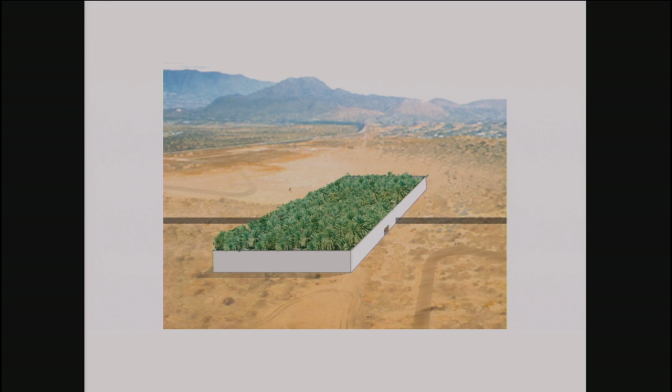Now, the difficult double for us is also an idea that one project always carries the promise of another one, or an echo of another idea. So here you have the Mexican border crossing project, which in one way or another is very reminiscent of this picture by Bas Princen, a photographer with whom we work very often. This is one of his own photographs - it has nothing to do with our work, which in many ways started to become part of this accumulated knowledge.

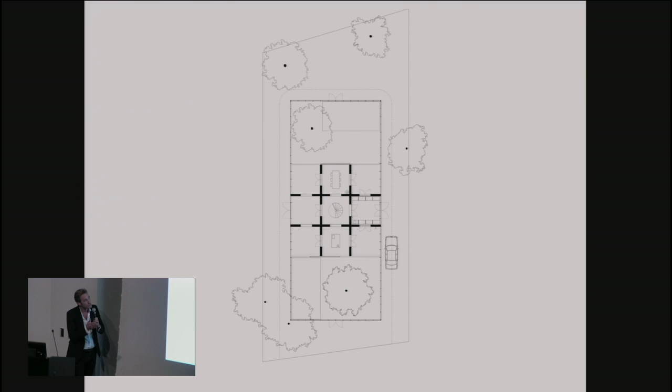For us, thinking about this endless development of single family houses, and the idea or the dream of luxury in that, we thought that was something to think about, especially because the plots are actually quite small, and every plot has its single fence to make it clearly your own property. For us, the fence became the main device to define the house, and we actually put it not on the border of the site, but inside, to become the first perimeter, which is the real house.

As you can see, somehow at its margins, the site left a certain wilderness. So the idea of being back in wilderness was very important when we constructed this house. At the same time, the fence forms this green perimeter, which changes over the year. Every season these leaves fall and come back, giving you a domesticated patio from which you can start living the real house.

Inside this perimeter is constructed a house based on a very simple idea of a plan of rooms. Rooms that have on the ground floor a very basic repetition. It's a cross plan, 9 rooms, and it doesn't have a facade, since you're immediately in relation with the 2 domesticated patios of nature.

On top of that, there's the same plan repeated, but in a very different way. It is, as you can see here, a house 3 meters high, very elementary on the ground floor, and it becomes a roof standing on that perimeter, on that fence, but with the same plan. This is the plan of the first floor, with the same plan, but this time it has a facade around, looking to the fields in front and the forest in the back, not towards its neighbors. It just repeats the openings in the walls of the rooms every time.

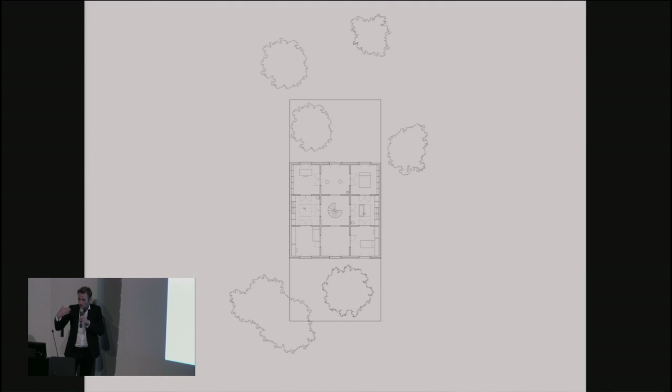And of course, it gives 2 very distinct universes to live in, although the rooms are just repeated and filled in according to how we live in a house, by furniture, by elements of life, by things to live with. Even a bathtub could become a piece of furniture.

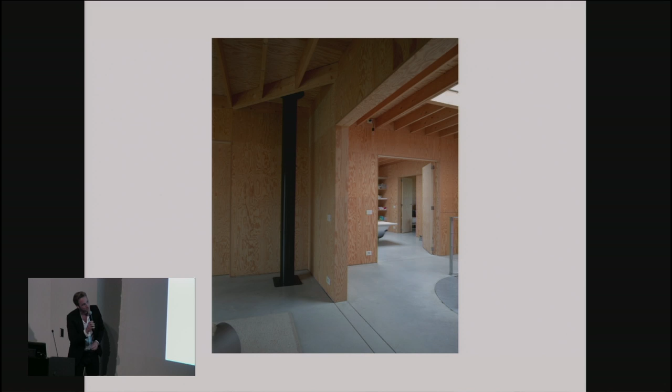What was very important with this house also is that we design it from the inside. It's something we do a lot with our projects. This shows details where we show the windows, how they're treated and hang on the perimeter on the outside, and we have very big sliding windows that make it possible to close off one of these rooms on the ground floor. This kind of thinking is ultimately brought into detail, both in concept and in the detail of architecture.

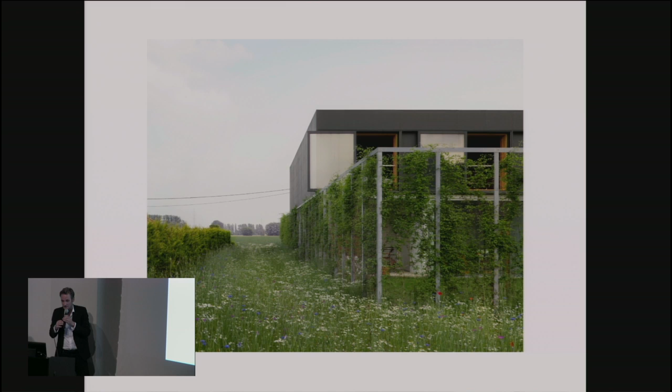So this house which David describes, as David was introducing, we try to always show double projects in some sense. It has its double in this house, which is built not so far away from the first one, about 15 kilometers away. You could say a very similar context on the one hand and quite different on the other hand.

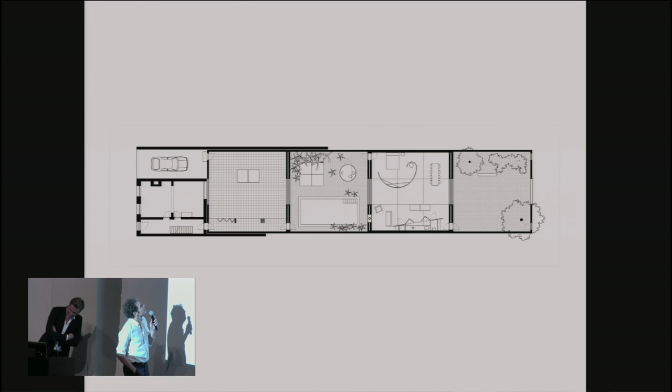And we were even more intrigued because they told us they would like to make a weekend house there. I have to say, Belgium is not very beautiful, but that place is even worse, so we were totally shocked. We thought, you never want to do that. But in some strange way, the fact that they insisted and came back to us and said, no, we want a house, and it even needs to have a little pool or something. You can do whatever you want with all this stuff in the back of the house, but we want to keep the front house.

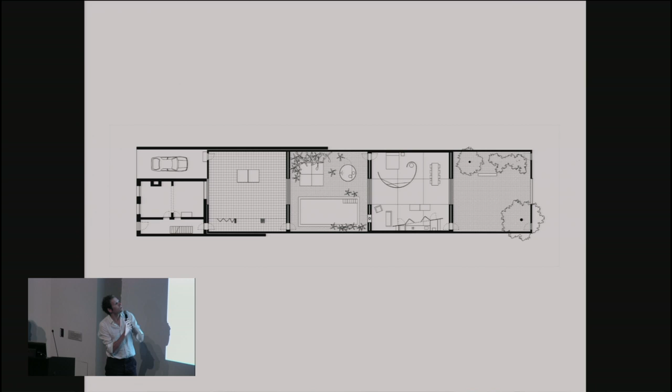The house David just explained has 4.5 by 4.5 meter rooms, so in a way a quarter of this size. These big rooms were either outside—the first one and the fourth one—or inside or semi-inside the two middle ones. So very similar in plan to the building before, but sometimes, as the section after shows, the first room is somehow inside and the second outside, then inside again, then outside.

So there's certain ambiguity, very apt we thought, within that idea of building a building which totally escapes its own context—very ambiguous about what the actual climate and the actual specificity of the interior is.

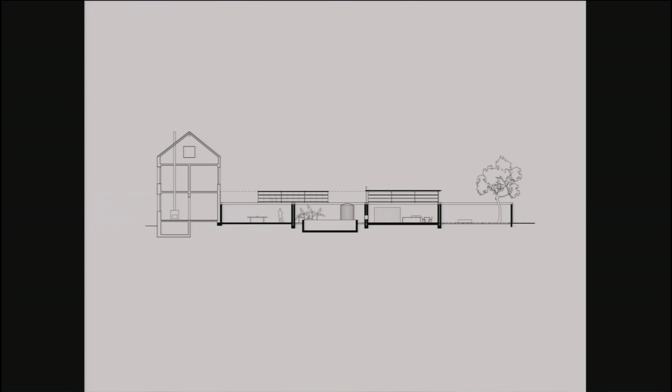So here you see the front house and the new house. The new house, seen from the front house, is in a way nothing more than a sequence of 4 big rooms. Here the roof is in front of the first space, and the space with the pool is now open, when the weather allows.

You see that in some sense the house fills the whole site. So as opposed to the first building, here the borders are completely taken, and everything is somehow ambiguously either garden wall or building wall. That's how you approach the house.

There's a kind of single brick wall—I should say something about it—which, when you enter, is in a way a white painted wall with typically a steel truss on top of it. If you go back to the section or the plan, you see that the rooms are made by these single brick walls.

So there are 4 rooms, always with a single brick wall. When the rooms touch each other, there's a double wall with a certain thickness. The sliding window goes in between, and there's a double door, which adds access to what the sliding doors already provide, to each of the rooms.

So literally a set of interiors glued against each other. The moment you see the last one, in the front or in the back, you see that single brick wall not treated, because the only thing we're really interested in is the interior itself. So you go back to that sequence, and you see the way you approach the unfinished outside wall, which to a certain extent we ignored.

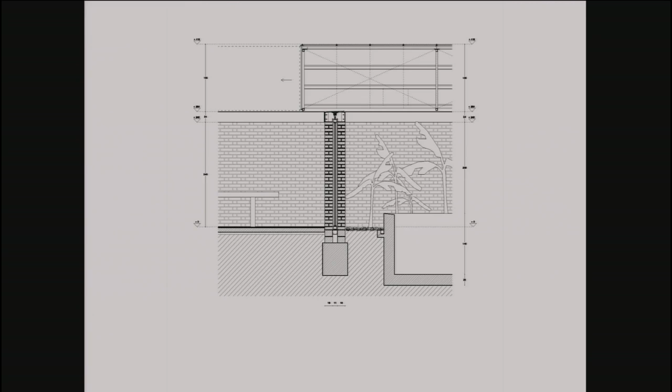Of course you might think this is extremely specific, but it's exactly this specificity—the height of the wall, which is 2.70 meters, these steel beams on top of it, which somehow make a cornice but also make a rail for the roof to move, also make a rail for the glass to be open or closed. It's these very specific details which, in our opinion, make the house perform that way.

So there's this ambiguity about what these elements really do. In some moments the beam is really functional, and in other moments it's there to complete, in a way, the architecture. So in one of these rooms, the most closed room, the roof has the same detailing as the movable roof, but it's just fixed and closed.

It's a very simple element made out of leather on the inside and a very thin kind of Polish pine wood, kind of plywood, which organizes the space. For us, interestingly, it's exactly these different sizes of spaces, although they're always the same, which force these kind of different solutions.

And then ultimately—I believe it's more or less the last image or sequence—you see that what we thought ourselves was totally impossible, that you could actually build an escape space in the middle of this kind of mess, turned out to be a reality. Cutting away roughly 3 meters from the existing context beautifies what immediately surrounds you.

Second duo, this is also a project in Belgium. We look at an aerial picture of tree growers - pépinière in French, or tree nursery in English. It's a company that grows trees and transports them all over the world, one of the biggest nurseries in Belgium and actually in Europe.

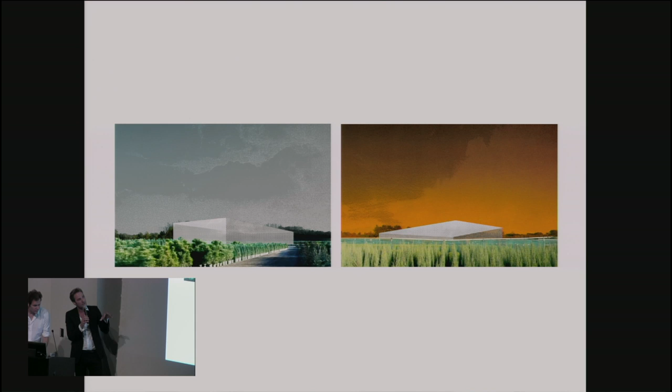In the middle of that there would be this gigantic hall covering trees for a few days to dry them before transport. And this is our take on it.

It shows perspectives from different sides, and we were very intrigued by the master plan as such. You can see it has different angles from where the trees come, and we took that kind of plan with two straight angles, but obliquely made to each other, as a kind of hinge moment of the urbanism, to be the plan of the hall itself.

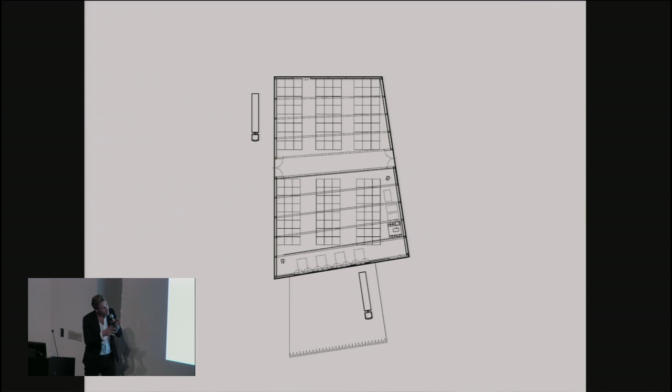The hall takes within itself the same urbanism of three blocks and makes a gigantic span. For us, the challenge was how to make an interesting industrial building - maybe it's just about two things: its structure and its skin. The structure has a very big span at some points, smaller at others. The height changes because it's a sloping roof which allows rain to run off.

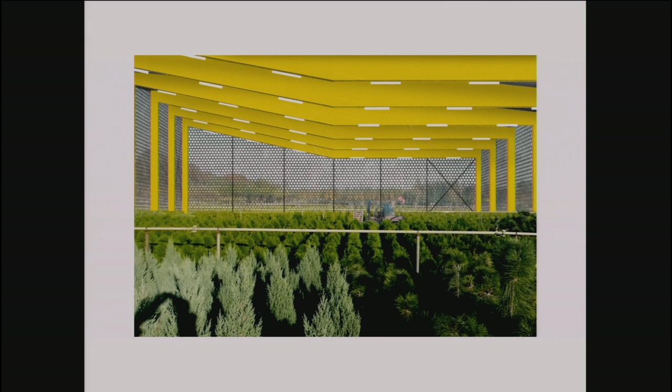At the same time, these trees needed to be dried, so the hall didn't need any isolation - it needed ventilation. This is a collage we made showing the ambition of the hall: just two things, structure and skin.

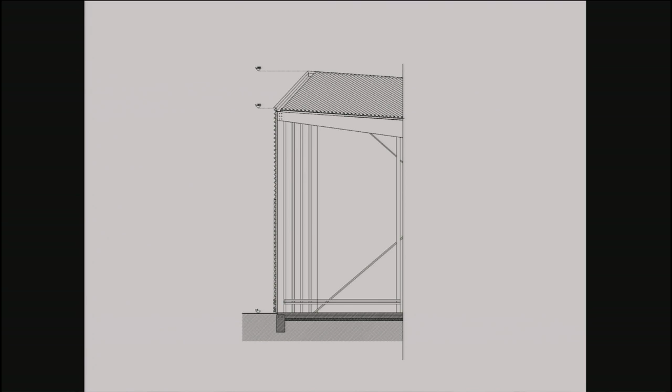Because of the wave of the corrugated steel, we could use it directly on the primary beam and column structure. In the end, it gives a very big building, a very big box, but with extreme lightness - wind goes through it. The roof isn't perforated, but you can see the silhouettes of trees stored there to dry, as part of the same plant scheme all around.

In the end, it's a simple way of making doors in such a skin. All details became very important, like how to make a roof edge - which in the end we didn't really make, we just cut it like with scissors. And it gives this.

From within, it's even more transparent because the light outside is mostly very bright during the day, so you can look outside through these corrugated steel plates. Every door makes a frame holding the same corrugated steel plates, and gigantic doors to bring in these trees - these are nine meters high.

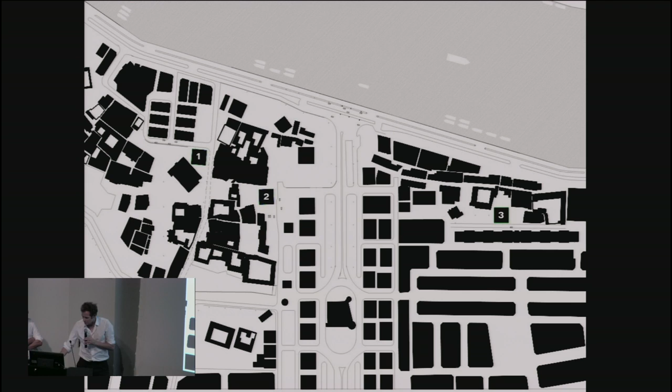At the same time, in our practice, we are not interested in totally reintroducing this old technique, but rather to try to translate that, to take that into the 21st century and understand what you could do with it. So here again, you see these 3 spaces, perhaps more clearly visible as an attempt to densify the existing fabric. We thought, can we make these spaces as an attempt to introduce something like a microscopic park of 24 by 24 meters, 3 times, and at the same time use as a technique to make that park a very technological version of this filtering or filtered effect of the arish perimeter. So the palm leaves here being not the dead part, but the lively part. Here you see the palm trees, these black dots in the middle, and the perimeter being somehow this curtain as an answer to this arish.

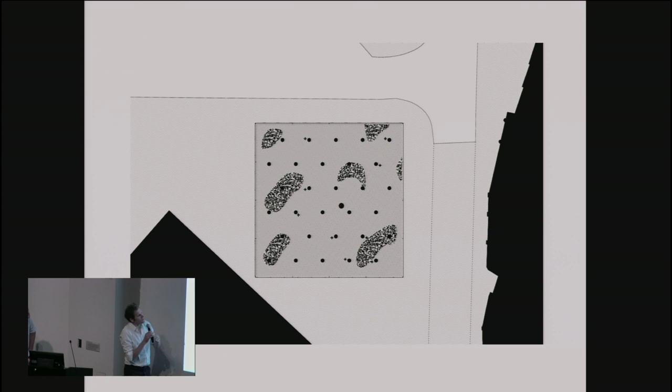So here you see the 3 projects, each carefully chosen to make a much more densified area around the entrances of the existing mosque building, not a peculiar building, but somehow totally lost in space currently. Another one, trying to reorganize what is left and awkwardly left of the heritage area. And the third one actually there where the main buildings of the biennial were. So here you see the detail, and the detail is in that sense somehow a brother of the project David just explained.

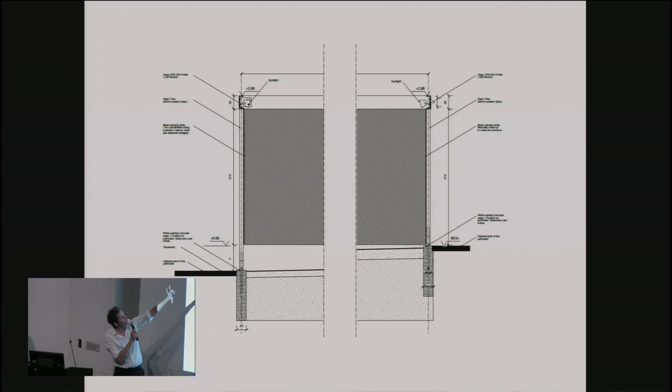It's a column, it's a beam, a round column in this case, a kind of U-profile beam which carries the lights and is always horizontal. It's a 3-meter high steel curtain. The floor is never always the same height, so somehow this very silly detail becomes the architecture of the project. And then it's the curtain itself, made out of this kind of steel mesh.

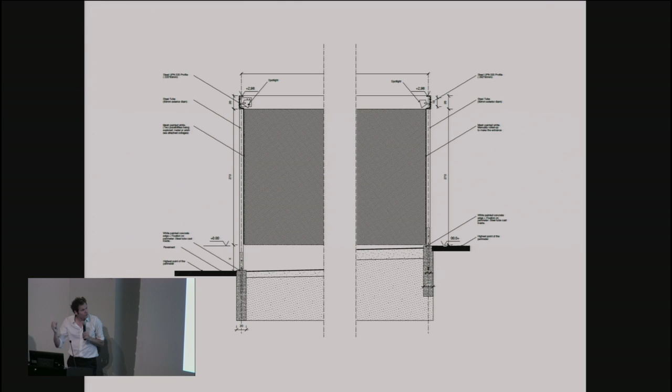Then the decision to, in a way, take away all the paving every time we put that curtain, making it into a very small park or a garden, and then plant these palm trees. So here you see that, the detail of the top and the curtain, and here a set of pictures.

As a result, you had this very simple project, almost, you could say, a May '68 idea of sous le pavé, la plage. And this kind of cultivated space, because of course it needs water cultivation, otherwise these trees die in like 3 days, was an attempt to introduce a green spot in an area which does not have it at all.

There's even this little water well, as you can see here. But not as a kind of European idea of a big park. Because of this curtain, it is extremely private. So it was very successful exactly because of its privacy. In some ways, it could negotiate the desire to be in such a space, but not have to share that exchange with many people at the same time in an enormous open green park-like spot.

So here you see a set of pictures going from the first pavilion, garden pavilion, to the second one, where always there was a concrete element of a different size, going from a very small size, which is the water well, to a much bigger size, which actually made only this part accessible in the second pavilion, to the third one, which was actually at the entrance of the Biennale.

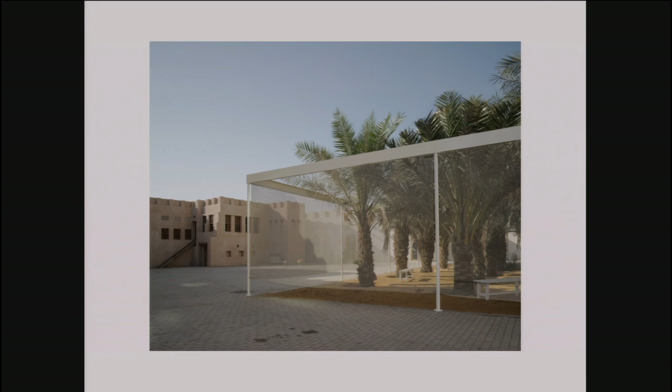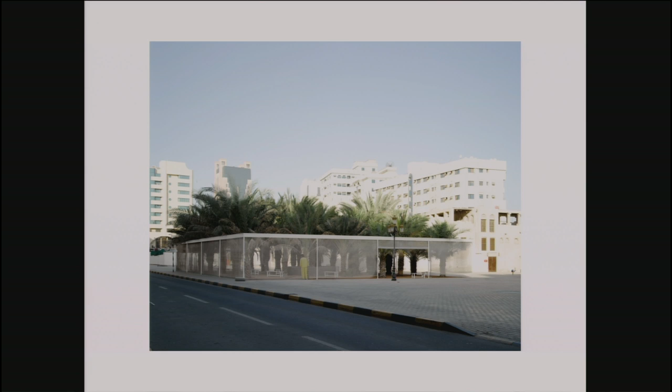It worked somehow as a place for different types of events, and there was something like a tea bar that you can see here. There, obviously, that guy is not exactly enjoying the space. He's cleaning it up.

This third group, so we had the boxes with trees. I would say this group, they're projects with columns.

And actually, we were asked by the Ministry of Culture to think about existing buildings in that tissue, existing buildings that have a certain name. They're called dar, which is the Arabic word for house. And dar, in this case, they're also used for the playing of traditional music.

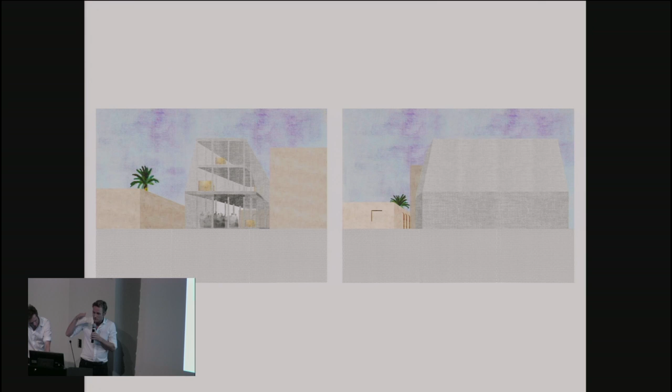And we like the fact that you could somehow make almost like a Le Corbusier's domino, 3 floors of concrete and with columns, and make that type exist in correlation with the existing types, which are actually only buildings of rooms. You can see here the plan of the bigger extension of the existing dar in the main, very dense tissue.

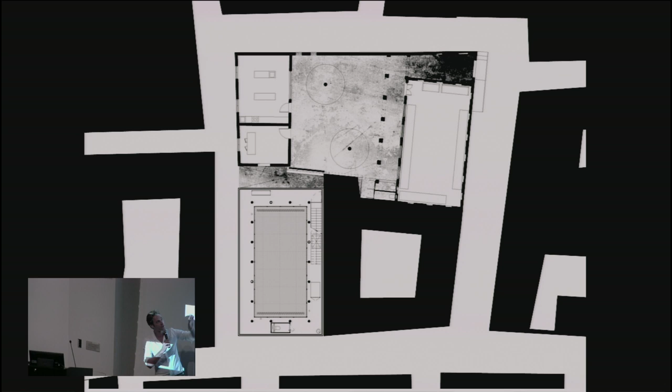We made also, in another location, this is Rifa in Bahrain, a similar situation. The building is slightly older, the existing one. We made also an extension there, but the tissue, as you can see, is almost gone, but still there also a similar annex, you could say. And we were very intrigued by how these lower existing buildings could relate to the new extensions they needed.

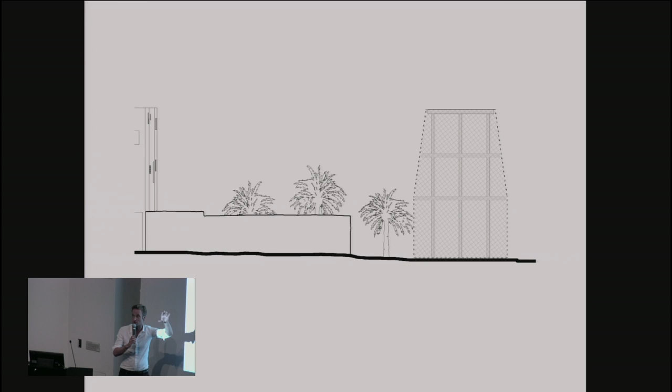Here you can see the one in the denser tissue, and the related one here: already a new building, also 3-4 stories high, and the existing, very old one, which is actually only 100 years, but there it's quite old. And then again, the new building.

These existing buildings have almost what we really like to make: a courtyard with rooms, very simple rooms surrounding it. We thought, how could you add a type to that?

This is a section through such a building, the extension, which is just 3 floors of 3 rooms, all composed on slabs of concrete, and in the end, almost like little temples surrounded by columns that carry each of the floors.

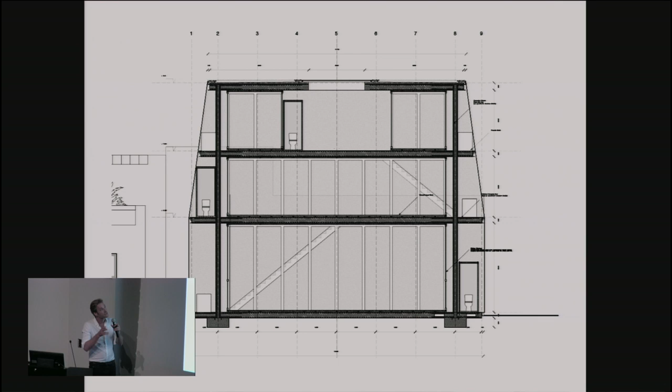You see the floor sticks out a bit, so you can make a strange silhouette with the building. This silhouette was very important because, in a way, the idea of such an open structure in concrete could be covered, almost like the mesh that Kersten was showing in the project in Sharjah.

We were of course influenced by that, and we thought, could we make a building that has almost a garment, a piece of clothing around it that protects it and shields it, gives it intimacy, but at the same time some transparency. And the plans are very simple.

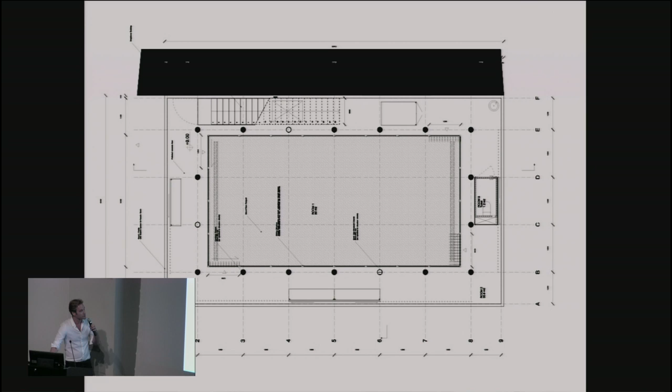These are just rooms. This is a performance room on the ground floor, an education room, and the same in the other one.

But you can start to see that they form a new play in this existing mesh. This is the one in Muharraq, and they make little access possibilities.

At the same time, when you take away the curtain or mesh that is seamlessly placed over the entire building, you see the very basic and simple organization: a space you use to circulate, surrounding interior spaces used for different reasons.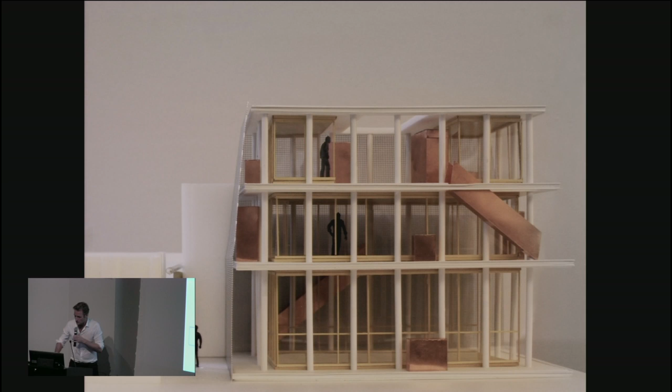The same for the one in Riffa. They're now being built. This is the one in Muharraq.

You can see what we really wanted was, with very basic means, to make just a column, a slab, and within that, as a frame, you could start thinking to live it.

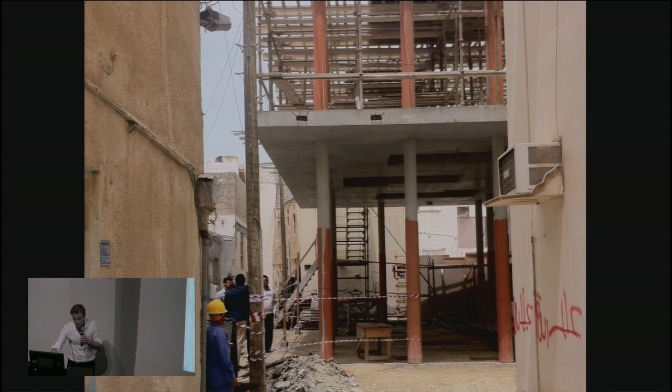This is the rough construction. Today it's been evolving, and this is our research for again a mesh, a metal mesh, for the skin of these buildings.

So what interests us is how you could make such a thing without panels, without things that are repeated, but to consider it as a real piece of clothing.

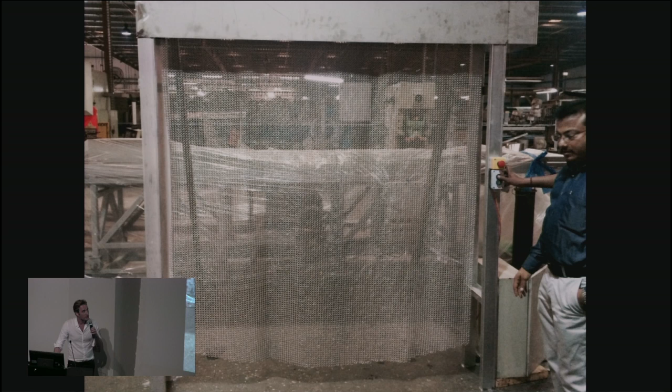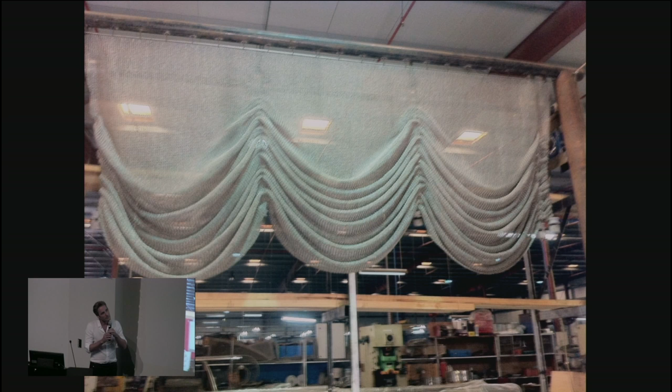So without any joints. We are now working with a company, actually a Bahraini company, who produces this mesh, which can also give us a certain way of making the small buildings in the tissue perform like little theaters.

This is our test for the ground floor, where cables are integrated in the mesh that pull it up, and where at some point it could become part of the urban tissue, the whole performance space behind it.

The whole question, our research and thinking with this mesh, is trying to negotiate between these massive buildings and something new that is massive and at the same time extremely light, almost like the drying hall in Belgium.

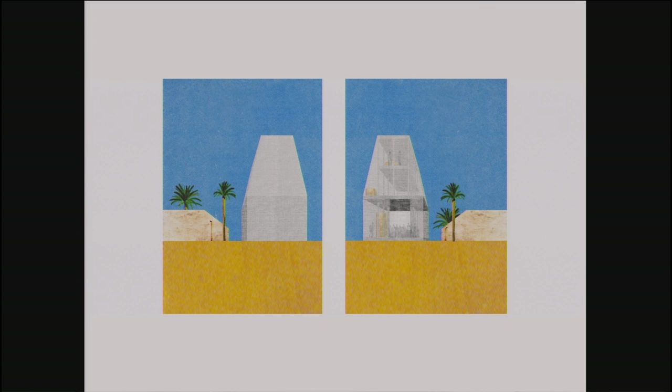I go back one second to this project, not to pursue it further, since David beautifully explained it. But what's interesting, perhaps as a bridge to the next one, is that it's a project about that new building, but at the same time also about the building standing next to it.

You could say it's a project which tries to negotiate a problem, especially in Bahrain and the Middle East, which is one of heritage. What on earth is heritage when the oldest building you saw is perhaps only 150 years old, and the other maybe 20 years old, but because of this very extreme climate they're endlessly replastered and repainted. Almost the only thing you can keep is the idea of type.

This argument of keeping that building as a type—because they were originally commissioned to us as extensions of the building—but keeping the type, cleaning up the type, and then building that building next to it, was a crucial thought for us. Of course, that then translated into the two buildings you just saw. Now, exactly this thought came back here, to a certain extent, in a very different context.

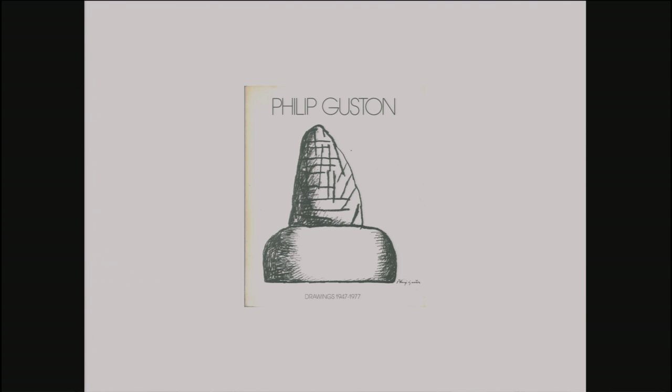This beautiful drawing of Philip Guston is interesting. Most of you probably know that Guston, in the late 60s, mid 70s, all of a sudden moved away from what he was known for at the time—a kind of unresolved abstract expressionist style. He started making these drawings and paintings which were somehow figurative, but very confusing and difficult to understand. This one drawing, you could say, is at the same time two more or less abstract objects, one on top of the other, but also somehow an object on a pedestal. And if you know many of the paintings from around the same period, it's also somehow the head of a Ku Klux Klan. This thought—that something carries much more than the initial indication of what it carries—we feel is very important, as much in Bahrain as it is here in this house.

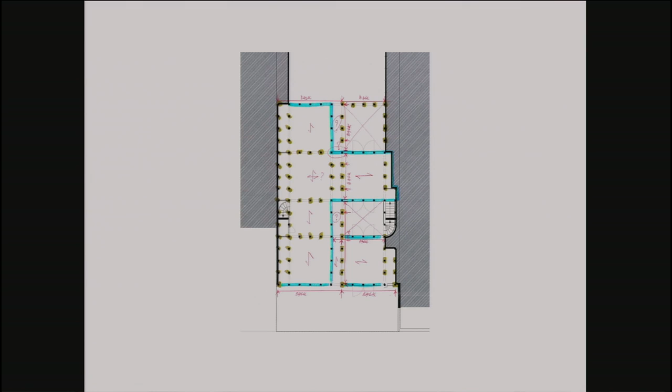So here you see that - the detail of the concrete columns, as you can see them here on the right. You see a few - actually there's also one there on the very right, with a kind of natural stone infill. And then these wooden columns, which actually have this steel column core, have either this window, this glass, or even a door, which is also the only parts which can open - the doors and the ventilation panels. We decided to put that all together exactly to keep the glass as confusing as possible.

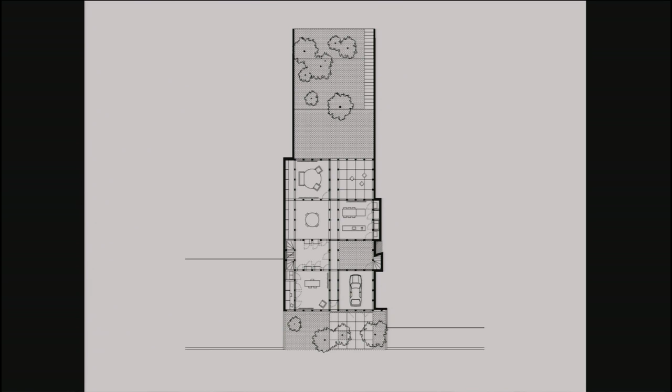Maybe I should at least explain you for a second in the plan what is what a little bit. So you enter the house actually here after you walked under it. There's like, in a way, only one room where you put some furniture in between the columns, so it makes that separation. You have a salon and a set of other rooms, an outside room, and here kind of a garage. But of course these rooms, they have names, and at the same time they don't have much of specific function.

Now, within this, and to a certain extent in that tradition - you could say even of a Roman house - it's only by changing the material of the floor that you make the differentiation. So here you have this concrete, which has this kind of brownish effect, just by adding a little bit of color to the concrete before it dries. Here you all of a sudden have an extremely expensive floor, which is leather. It's a leather floor, but somehow it looks almost like plastic. So in a very strange way, you don't necessarily always judge its exact value.

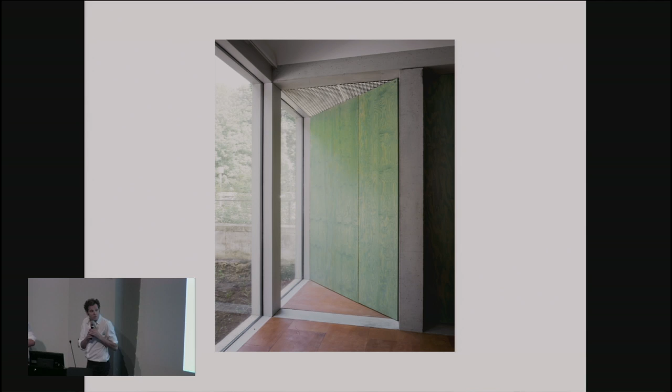So here you have this leather floor again, the concrete floor, and these panels which are in a way Polish pine stained green. So you know, it's all this - for example, in the story of concrete and wood, this is wood and that's concrete. And if you look at the one before, actually what you're looking at in front of you is all wood, and on the left is concrete, but then the frame of the natural stone is again concrete. So it's very difficult.

Here you have the steel doors, and perhaps the extreme abundance of materials confuses you so much about the materiality that you forget to look at the columns themselves. Here you see a door on the right with a little light, actually a ventilation panel, and all the switches—because in order to get you very focused on the columns as they simply are, we did not add any of these to the columns proper.

So here you see that. You look into one of these living room spaces towards the slope of the garden, because the house was literally kept up, then dug out, then the pedestal was pushed under it—built under it—and then the garden continues.

So you see, in many ways, this project is about negotiating the edge of your own architecture. Like the dars which David was explaining—these dars, or dur, which is apparently the plural of dars—they have their autonomy, but at the same time, in their autonomy, they negotiate this very narrow space. Here also the autonomy of that new intervention comes up to the point of cutting the staircase and leaving it there, putting a railing on top, the same as the railing inside. You see it here again outside, as if this pedestal is an object totally on its own. That's the negotiation, which you could say is an expression of pure respect for the house that it exists, but at the same time is also one of total ignorance, as you can see.

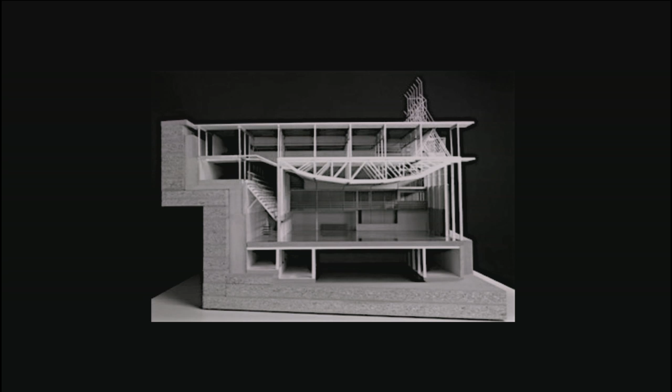The building is actually not only an agriculture school with classes basically, but also has a big gymnasium. For the gymnasium in this project, we used as a reference a very light project by Alejandro de la Sota in Madrid for a school gymnasium. De la Sota made this playground because there was a huge height difference between the two roads—classrooms on top and the gymnasium underneath. Somehow that section inspired us.

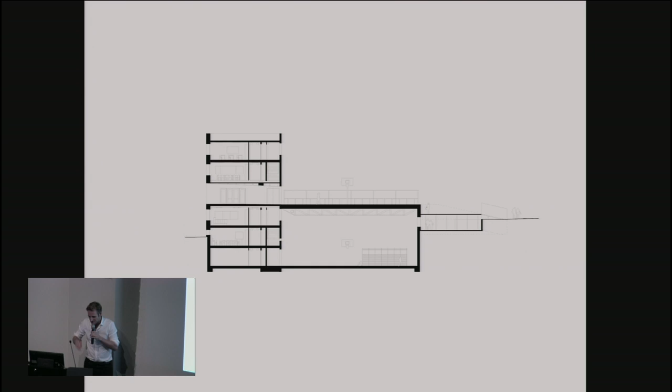It's actually a building composed out of two buildings, you could say—a normal classroom building and a kind of big box containing the gymnasium, but also resolving quite a big level difference in the terrain between the street side and the side of the fields. By combining these tools, we managed to put the playground on top of the gymnasium—this old fascination we had, we could really do it—and at the same time negotiate that with the main building of classrooms.

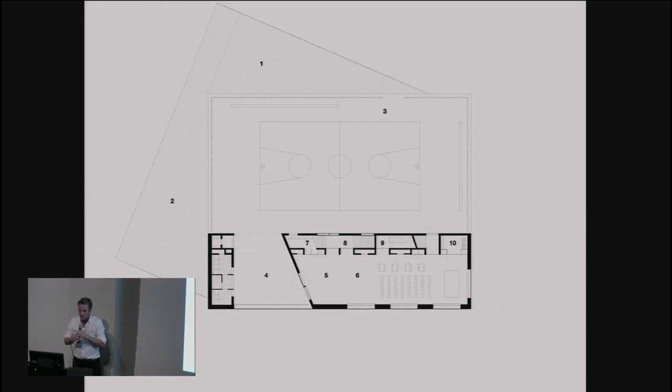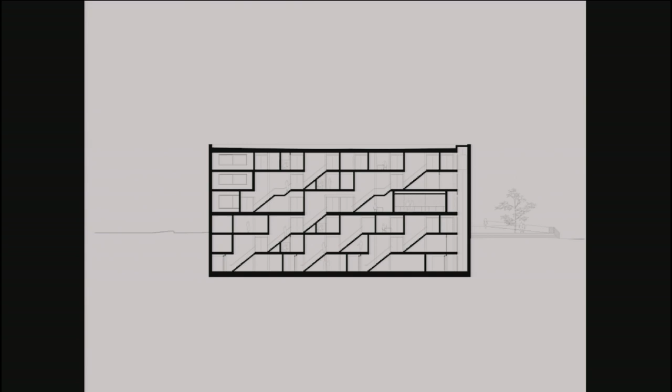It gave us different slopes that could resolve all accessibility around the building, going down, going up to the playgrounds. We switched the school from the playground to the street, suddenly opening it up, making a covered playground as a kind of window to the city. All this gave us a plan with two simple buildings, the gymnasium and the stairs, and in section it had to solve different heights, so we made one big set of stairs that could become the system of how to go above or below ground, and also the facade of the building towards the city.

That building was built in a very basic way. There wasn't a lot of budget, so we chose a system of prefabricated concrete walls that we used as a kind of composition to put in this facade, which is actually visible in the gymnasium space, where the stairs are.

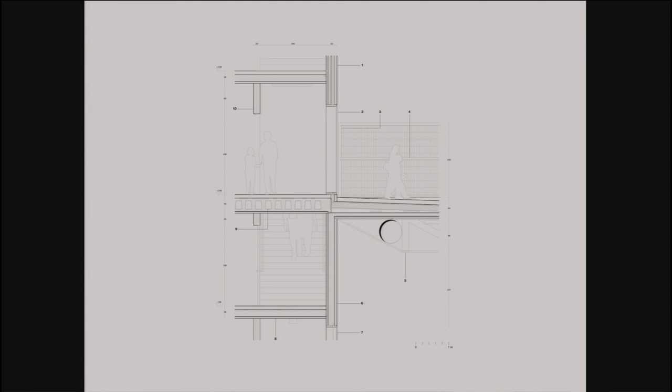What we really liked was a kind of almost like a decor that was rising at the beginning of the building site, just like a cowboy facade in a saloon somewhere. This line cuts through the entire project and explains how these two buildings collaborate and finally become one, made by its main perimeter as a set of windows, copied all around.

Windows looking really deep into the gymnasium space, and on top, the playground. As a main hinge, the school negotiates these lower playgrounds with its almost Belvedere-like playground with a window to the city, and the same windows in the stair act as a vertical element negotiating these two projects.

It's a very simple building, so we didn't put in excessive materials, but we managed to build it with these concrete walls, and finally, by adding just what we actually need for a school, we managed to make it into what it actually is today, a fully working school.

It's amazing how the relation with these fields happens, through an intervention by an artist in this Belvedere space overlooking the city, with bizarre moments you can find, like this one: a tree he took, and mirroring plates. It's an artist we work a lot with, Richard Venlet.

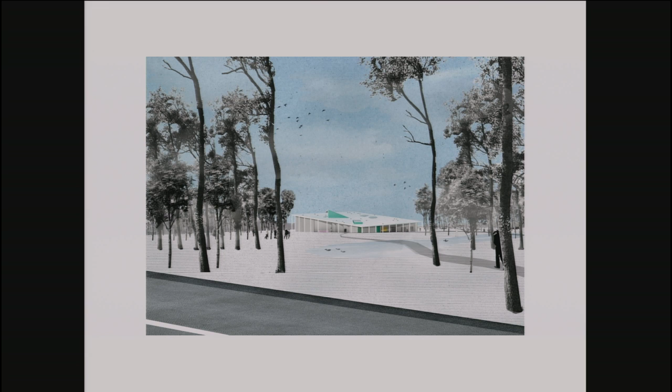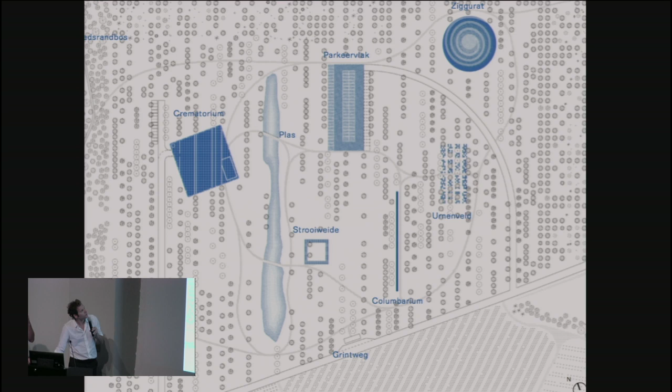So again, like in the school David just explained, an extremely difficult program with a lot of pitfalls, which we felt we had to counter with one simple device: this very big roof, as you can see here. The roof is about 50 by 50 meters, with these columns. You can see it here in a landscape design by Bas Smets, a landscape designer we often work with. That roof tries to find a combination of pure pragmatism—higher where necessary, lower where intimacy is important—and bigger than necessary so you could see it from many angles, inclined to make it, you could say, like a nature morte, a still life.

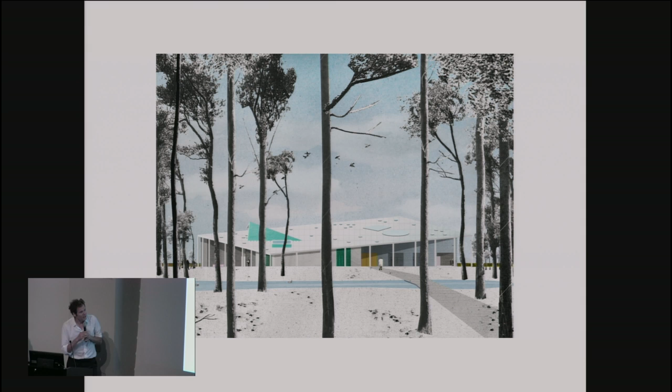So we thought, is it possible—here again we worked together with Richard Venlet, the artist we mentioned before—to turn this specific roof into a fifth facade, but also as the place where somehow, through the combination of elements on it, something is said, as unclear as that might be. At the same time, it's a place where you have to organize the chimney where the cremation happens, but this chimney cannot be seen. That changes from country to country, but in Belgium it's absolutely unacceptable to see a chimney on such a building. So you have a set of elements extremely ambiguous in what they are—an element for getting light, a very specific punctuation, a chimney you could say—since you only perceive the totality of it. You don't avoid the problem, you actually use it to your advantage.

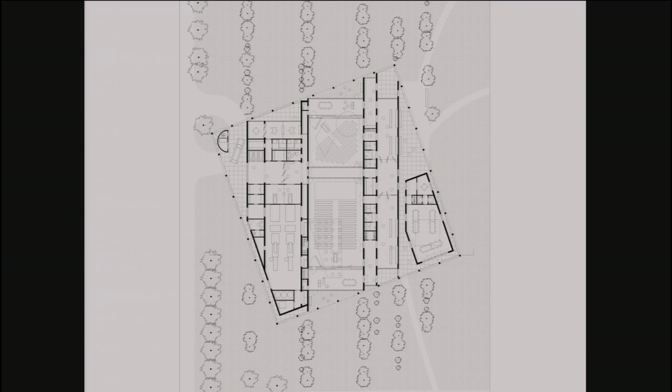The wall system, as David was explaining before—this specific, very cheap prefabricated wall system—we also use here. So you have a very simple building with a set of parallel walls which follow, to a certain extent, the logic of the landscape plan by Bas Smets, with a specific plan of two halls which could function simultaneously, with a way of entering and leaving: you enter towards the center and leave towards the sides. At the same time, it hides almost half of its program, which is accessible directly by these cars, and which contains the machines that are the core of what this building is about.

So here you see that, like I said, a big box as a public building, where in each moment this height difference is used to its own advantage. These are the perspectives from the competition; we are now developing this further with Richard. So in a sense, you could say it's an almost-nothing approach to architecture. These walls are the same concrete as before, but it's the infill, the lights, the specific openings, in a way the piece of furniture, which make it particular. It's an attempt to find buildings that are on one hand super complex, but then, because of the demands and the financial context in which you operate, remain strangely simple—so simple that you could say only the perimeter, the big square, is what counts.

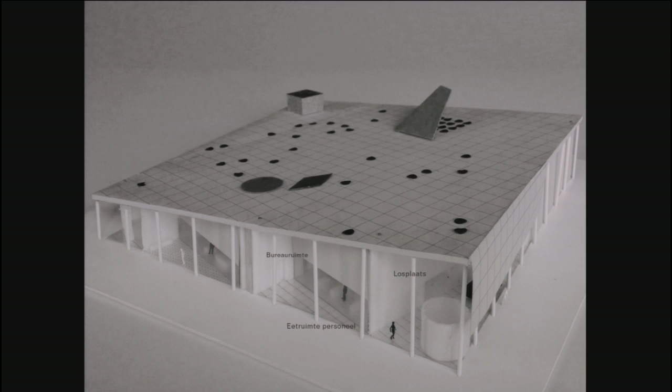So this simplicity is something you've been noticing all the time, I hope, but at the same time it comes back in a new category, which I would even dare to call large perimeters, or big perimeters.

The first project was actually mentioned by Amale in the introduction. We were asked to work together with Christian Bourdon on a house project which is kind of peculiar. He bought an enormous area in Spain, near Barcelona, but not at the seaside—a mountainous area, very beautiful, just next to a natural park. In this immense terrain, he will build ten houses by ten different architects that he chooses from around the world—from the US, India, Japan, Belgium—so that were us.

So he asked us to build a house, and actually the question is very simple. It's a secondary house, a holiday house. There's no client—he's the client, or actually he says you get carte blanche. You can do what you want. Think of what would be your dream house, almost, in that context.

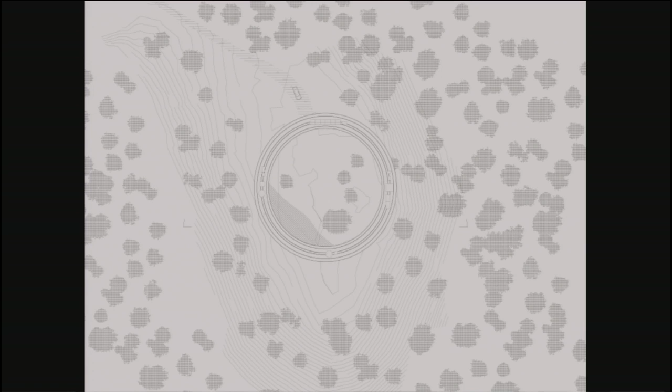And well, I'll show the house. This is again a plan where you see more or less the height lines around it, and how this circle embraces the entire plateau, the higher part on which our site was situated. The circle is 45 meters wide as a diameter, and 4.5 meters wide as a ring, let's say.

It's a roof with a circle and a square inside as a plan. The square is actually rows of columns that hold up the roof and form at the same time four different units that in combination become the entire plan of the house—where you could say some part, this court, is the living room area, some bedroom areas, some study and bedroom areas, and even an entire open house near the pool, which is part of the landscape. It's a pool house.

In its section, very simply, you can see the drop of the terrain, but in the middle it's flat. It embraces really this plateau and makes just a datum there, and creates this kind of ambiguity between what is nature outside the house and what is nature inside the house. It belongs suddenly to you, but it is exactly the same as the one outside.

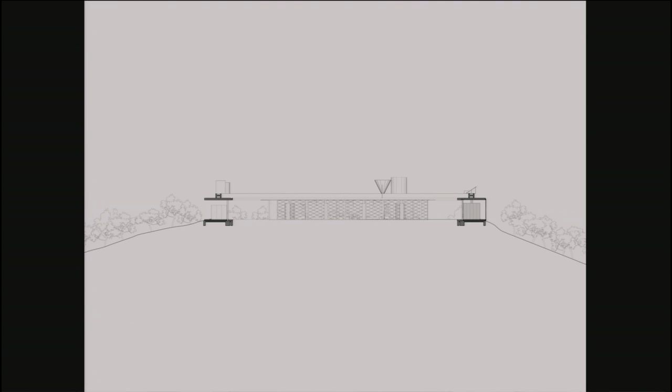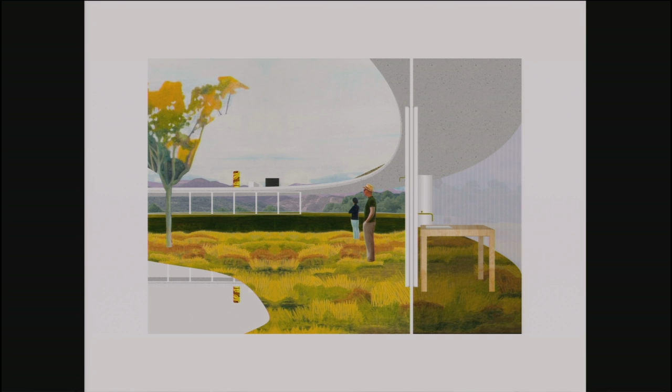And at some point, just negotiating this edge of the plateau became our design method of seeing how to see a house there. These were the first collages we made. And of course it seems like a gigantic house, but in the end, if you counted the real square meters, it's a house of, I think, 200, almost 300 square meters—which isn't exaggerated. It's just actually a big roof that makes a perimeter around the space.

As I was explaining, the columns, which are steel columns, just carry an enormous disc or ring in concrete, and also contain the actual facades that are in glass. So the straight line is entirely in glass. And there's a second facade that makes the curve, which is a very lightweight facade in polycarbonate, and which can actually roll open—so you could roll away this entire house facade to the other side and open up the whole living room. Also very important in the plan is this rhythm of columns on which we attach all the devices of living.

So you have a kitchen immediately attached to the column. There's this cupboard standing there. Even a bathtub could just be attached, because we see them as the only architecture really on which we can still attach these elements—so all the switches are also on that. And also, because each of the houses built in this area are fully autonomous, they need to provide their own energy, dig their own water, make their own heat. So we have this kind of collection of technical devices to be able to do that.

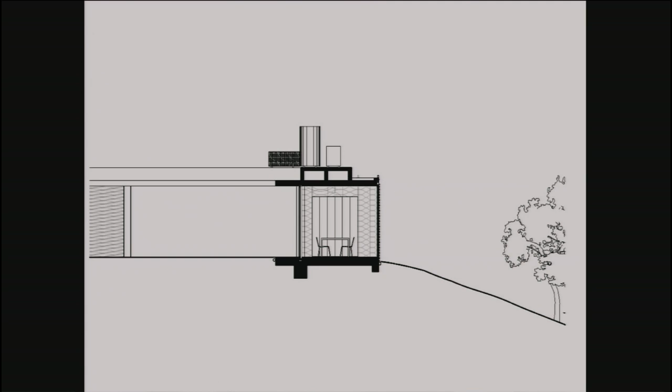So you have, as you can see here in New York City, all the water towers somehow. These we saw, or as the sculptures on Unité d'Habitation de Le Corbusier. It's almost a very strange sculpture standing on top of that roof, showing this technical level of what is living in that site.

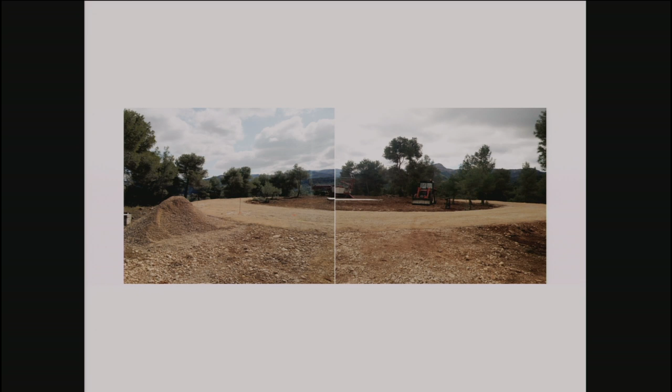And this was in the beginning of the building site. When we came there, we needed to put, let's say, out the lines where we wanted to have the columns, or real orientation of the house.

But when we arrived, it was really funny, because as if they made a road. It was 4 meters wide or 5, and you felt it's like a road making a little circle, the same circle we were walking at the time when it wasn't yet prepared. And just marking that house there was something very peculiar.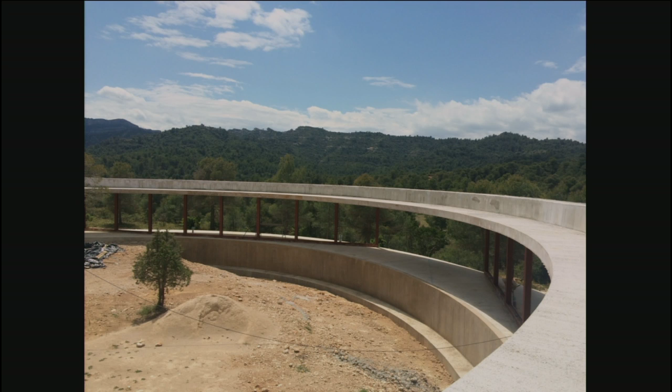With a pool that actually is partially made by the house as a retaining wall, and partially by the nature of the plateau. So it's almost a natural pool that leans towards the house.

And this is the pool house, actually, so it stays, as you can see it today now. This will be only added some pieces of furniture, because it's the open house. So there's no glass, no polycarbonate facade that makes the curve. It is how it is, as you can see it.

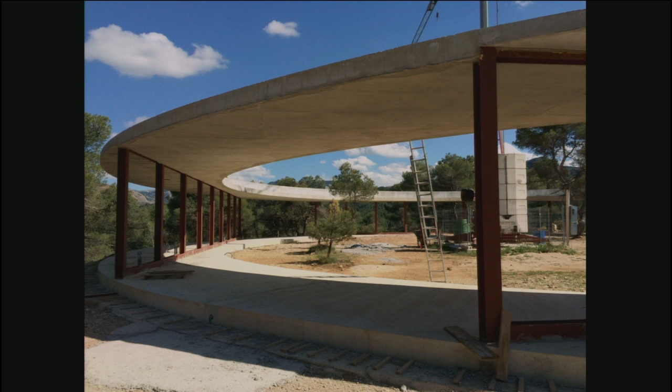And this is when you actually come from, let's say, that little dirt road to access, and the square being a bit larger than the actual circle, it gives the open corners at each time, which show and have these windows towards, which is the nature.

And this is actually the space for 2 bedrooms, that will be just made by some very simple furniture standing on these columns. Some cupboards, some bathtubs.

It's supposed to be ready for, I would say, New Year, I hope.

So the last project we wanted to share with you is, I mean, of course, and as you understood, all these kind of associations are totally arbitrary, because we could make other couples and whatever. But in some way, we thought it was interesting to bring them together, maybe because of the extreme difference in their scale, but on the other hand, in how, to a certain extent, they deal with something quite similar, which is, as David was explaining, the thought of maximizing something like a perimeter.

Maybe in the solo house, you have, of course, we never exactly work like a circle, that would have been absurd, but I mean, you have this idea of almost a geometrical interpretation of that border, that circle, which we somehow discovered while being there.

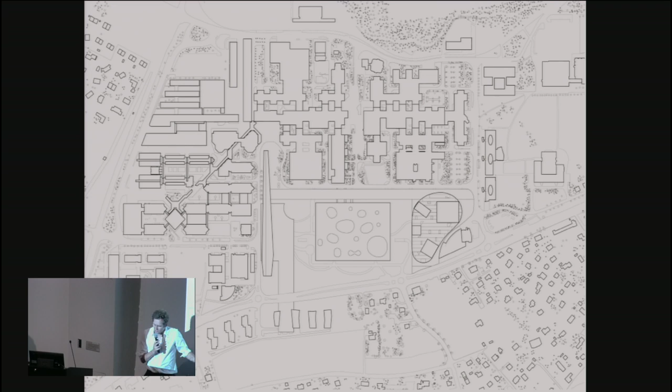So on the one hand, being there forces the radio and television somehow to give to the campus something. And as we all know, this Learning Center building is well known exactly for its kind of folded surface—for the fact, or at least I would dare to say the promise or the hallucination perhaps, that people would be able to hang out everywhere on beanbags and for some reason interact with each other.

At the same time, of course, this whole landscape, as it belongs to the campus, has to be something which, even after the building is there, at least that's how we felt, still is also campus. So for that reason we made a very simple project.

We made a building, on the one hand with that ear as I explained before. This is a kind of continuous space for work, for the redactions of radio and television, kind of a fictional No-Stop City with an endless interior. And that's being carried by these four, what we call in French émergences—somehow an elegant word to say something is higher than a box but not really a tower.

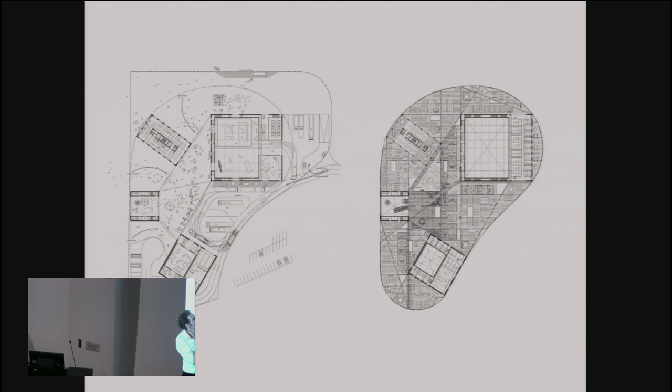But at the same time they organize sometimes extremely utilitarian, extremely big-size activities, like big trucks for recording and delivery, which drive in and out closer to the bigger boxes—literally big boxes for studios, like the very big one on the right, and the one here for the radio. And also they make space for cars of the radio television, almost like intervention cars of the fire brigade, which are parked there and then drive off.

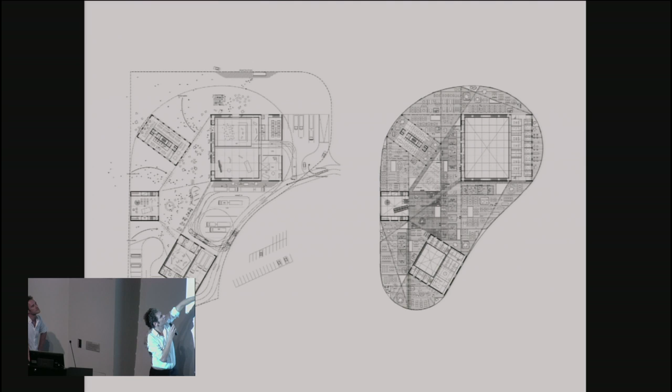And they make space more toward what is the real campus for a mediatek, an address, a restaurant, which is in a way part of the campus, and a whole set of covered spaces which really try to make usable space in direct relation to campus life.

So here, of course, two extremely evident references, but for us also somehow very valid: an idea of a space which is totally interior and is possible because it's lit from above. And somehow—because that's the fascinating thing about this drawing—it's always shown as a square, because of course it suggests that it's forever.

And so we thought, okay, let's cut off somehow the edge of the site—that's the closest to endless we can get. At the same time here, of course, Campo Marzio—in a way a building with many buildings, as many buildings as you can, so that there's a certain sense of shared space in between. You could say an urbanism without really an urban plan.

So here you could see a very literal translation of that in the zoom in on the plan, and here how the building actually looks like, or is about to look like, on campus. So here you have the street which borders the campus. This is the nasty building here, which kind of forced it into ear shape because it's there, and so it goes. And then, of course, you have the learning center on the other side.

If you get closer, you see that since these volumes carry the building, it becomes extremely technical, very much like the building David just explained, the Solo House.

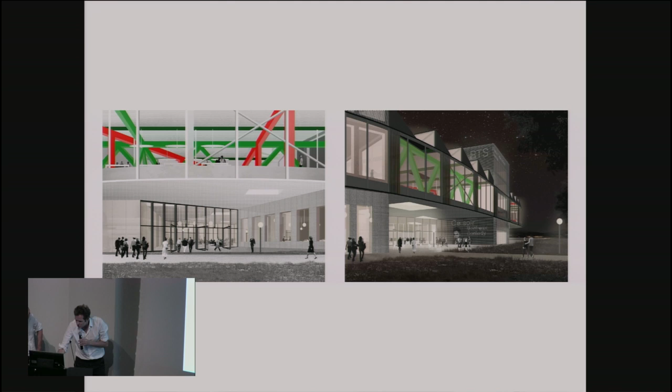These very big, what's the real word, girders or something, I think in English, I'm not sure. They kind of become the only architecture which you can really see. And then the outer perimeter is in a way the consequence of that.

So here you see that in section. So you have this big box and another big box which carries, in a way, almost like a traditional kind of shedded working space, 6 meters high, so you can have mezzanines here and there, and that's it.

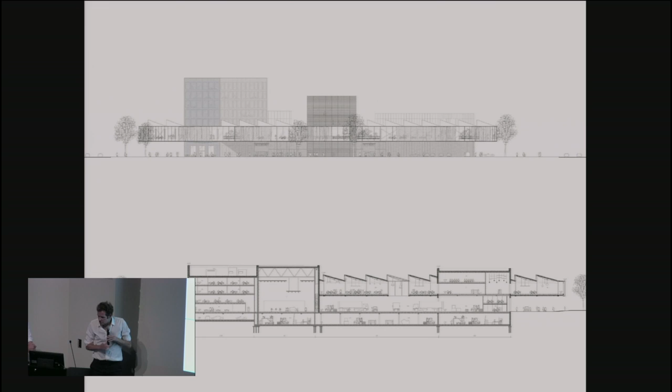And here you see the top, the consequence of that in the facade of the building as such. Here you see the technical project as developed by Bollinger and Grohmann with us. So in an odd way, you start to have these strange beams which are extremely logical.

They go from one spot to the other spot, and they carry the champ, or the field of production, which is here. Here you see that field.

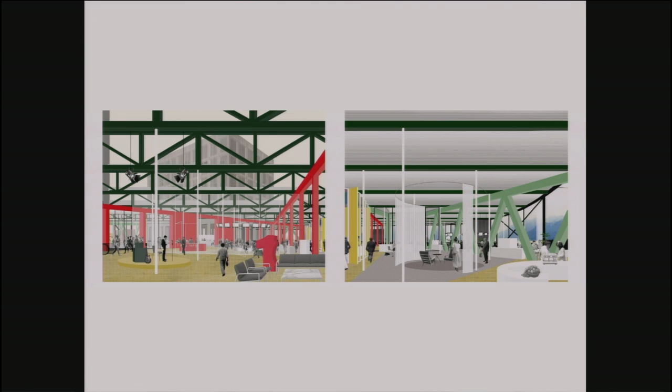You see also that, in this version, literally the totality of the span is the top, the shed is the beams, as you can see them here, like this very big Warren trusses, that's the word I was looking for, and then actually even the floor, which is hung with these kinds of stretchers, on this totality of the height which is needed to make it happen, let's say.

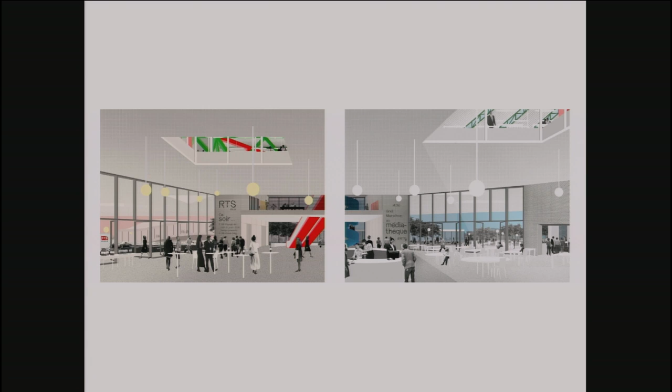So here you see that again. So here you see the ground floor which tries to mediate with the campus. And here you see how, of course, from the ground floor, these different addresses become the addresses of the building inside.

So this roof, of course, protects also trucks and loading and unloading. And these boxes, as you see on the right, are indeed these very high spaces for recording. So this is how we are now currently developing the project.

I think we both feel we were extremely lucky to have that chance, because on the one hand it's a big building which is exciting to do, but at the same time we felt it's also a building which brings together many thoughts, many ideas which we've been working on in other projects, so somehow they find their extreme consequence here.

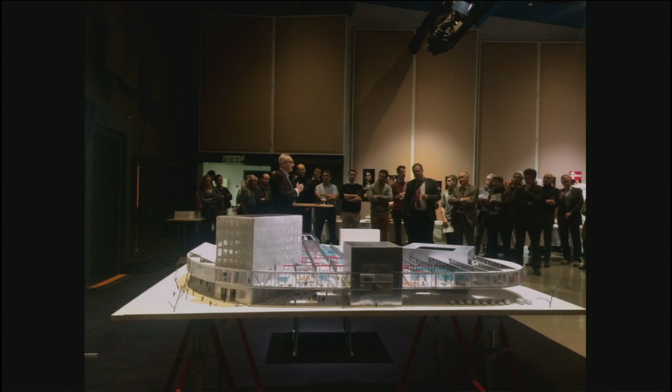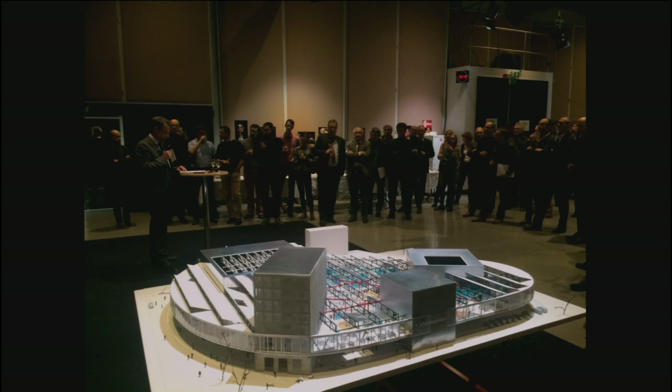So there's this aspect of the big box being a quite autonomous project where in a way the perimeter is essential, but there's of course also this idea of these different types which all together make a building which is ultimately quite complex, but each of its ingredients is extremely simple. So here you see a few pictures, and we apologize for the messiness of them because they're...

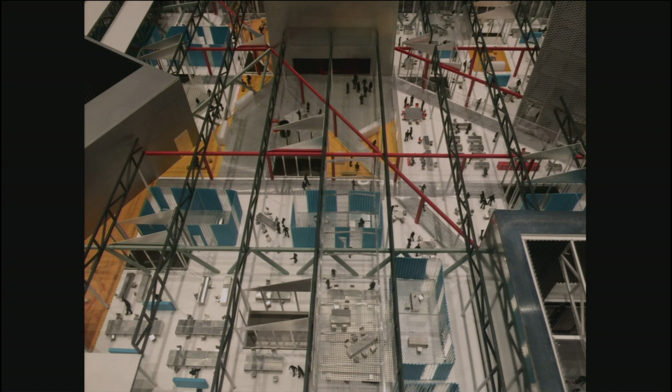...from the presentation model somehow in a small show which was done when it was announced. But it gives you an idea of how something extremely simple starts to acquire a certain sense of complexity, which is ultimately a space where you take the ultimate consequence of any of these extremely simple choices.

I think just a last thing - what interests us a lot is this, on one hand these two little references, but then structurally just connecting these boxes, making a plan, finally an endless field to work in, lit from the top and perforated by patios, at the same time organized by these big buildings. It's something that for us is a new challenge in our office, to deal with such a scale of building. And as Kersten was saying, the egg shape as such is maybe not even a problem, because the building is so big that the egg shape will never be seen except from a helicopter, which they have in Switzerland - there's lots of them. But okay, thank you.